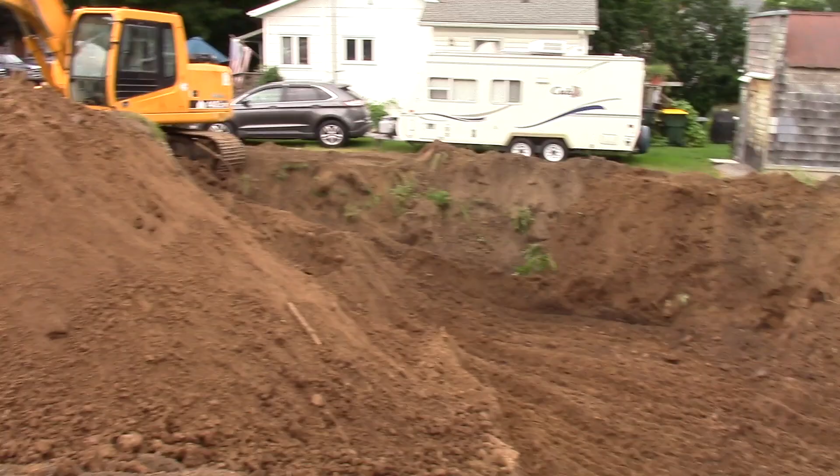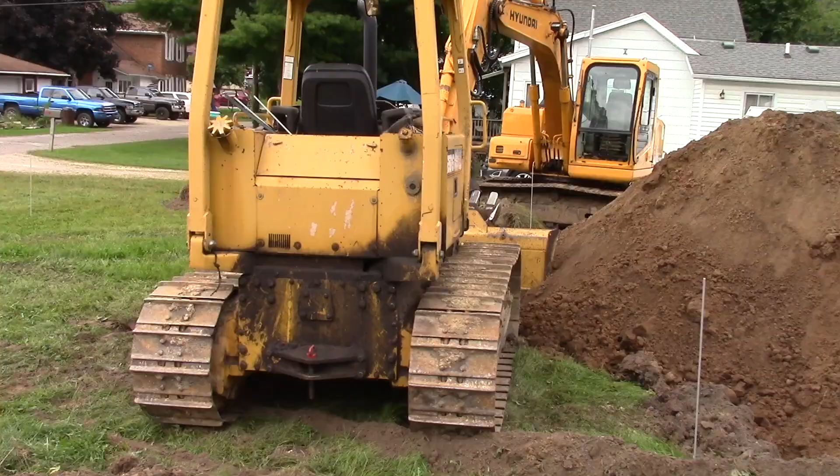Maybe to open things up, we've got a couple folks that want to say some things, and there'll be more introductions coming. Paul Wurtsema is the NHS project manager for what we're doing here today, and he's been working on this for a long time, so we owe a lot to Paul for getting this going and figuring out how we could do it given the economics of today and the circumstances we deal with. Let's give Paul a round of applause. Thanks a lot, Paul.

We'll also hear a little bit from Elijah. He's with Whispering Pines, our contractor that we're really happy to be working with on the project. So with that, I'll have Paul come on up here first. He has a few things he wants to say, and then Elijah, and then I'll have some things to say after that. So, Paul.

Okay, well, thank you all for being here. It's been a long road to get to this stage. Project started yesterday for construction, but a lot of planning went into it.

This has been about a year in the making, conception, putting some information together to get the funding from the state of Wisconsin, which is doing the funding through the Department of Administration. There was an application process, and that took a little bit of doing, making sure we had all of those items in place.

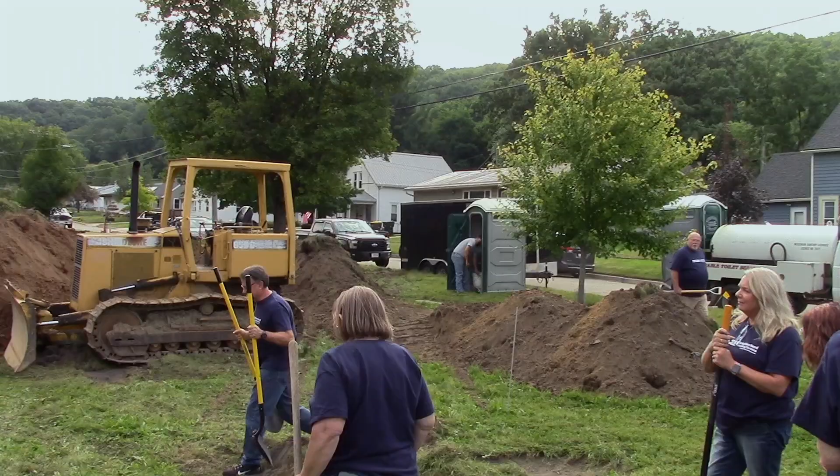I think one thing that's really telling about this crew and this team is when we talk to someone who's done a lot of these, one of our technical assistance advisors said sometimes people buy new shovels and spray paint them gold. When that idea was mentioned to staff, they said, absolutely not, that's not who we are. Let's bring our garden shovels from home. We're going to skip the gold paint. That's not really who we are.

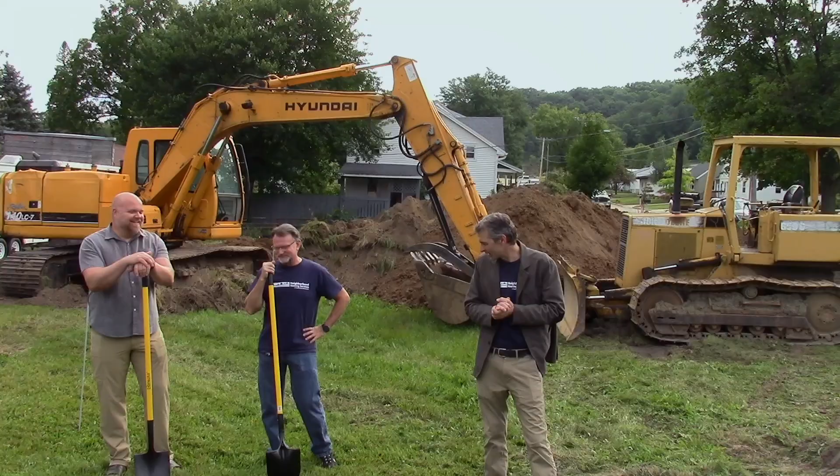So with that, well, there are a couple new ones here. Those haven't been used a whole lot. Yeah, doesn't look like I do much. No, it doesn't matter. So, yeah, come on out here, employees and board members.

A couple more here. We'll do this together. I'll give you my dirty one if you want. We'll try to get the contractor to clean the shovel, probably, but somewhat of a straight line. Oh yeah, thanks for that. It's probably just a general marker, but you never know. Come on over here, Nancy. I think that's what Nate had stuck in when he was here the other day.

Thank you everyone for coming. We'll stick around for a little while. Some of us have work to do, and we'll be getting right back to it.

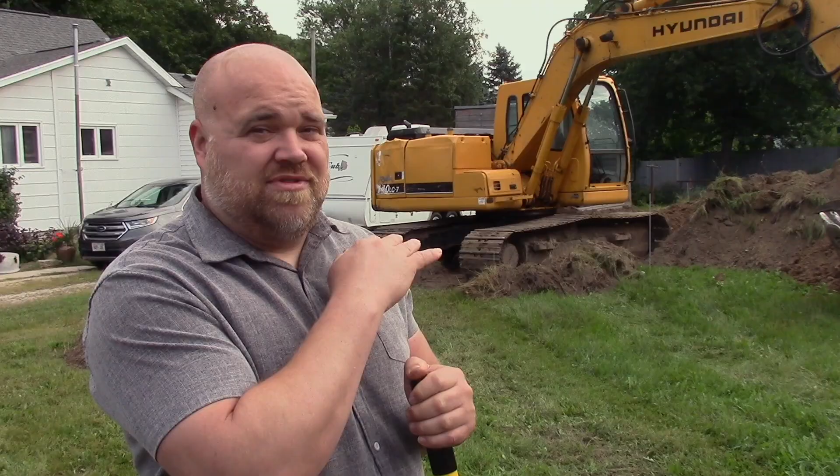From there, we're building an attached garage, and then there'll be a sidewalk poured, a driveway poured, and we'll be tying the two halves together with siding, roofing, trim, etc., and it'll be ready to go. So ideally, I'd estimate 3 months from today it could be ready to be on the market.

The house is going to face south. Technically, what's considered the front of the home faces Larson Street. Some of that had to do with setbacks, being on a corner lot like this. Even though it's more of an alleyway than a road, it is an official road, Larson Street.

The way the home is configured, we just got the state-approved plan which shows where the doors and everything go, so I can't remember exactly where those all face. I haven't studied it yet. But this will technically be the front of the home, with the back facing east, and there will be a door facing Kinder Street, which gives the opportunity for a porch or deck at some point off that front, or off that side, since it's technically the side.

Okay, so there is a floor plan on the brochure here. I'll take a look at that. Whether that's the newest updated one, I'm not 100% positive, but I don't think the floor plan would have changed much. Some of it also is going to be the basement.

So here we have the floor plan. That's correct. So what's Larson is... Larson will be along this side, and this will be Kinder Street here.

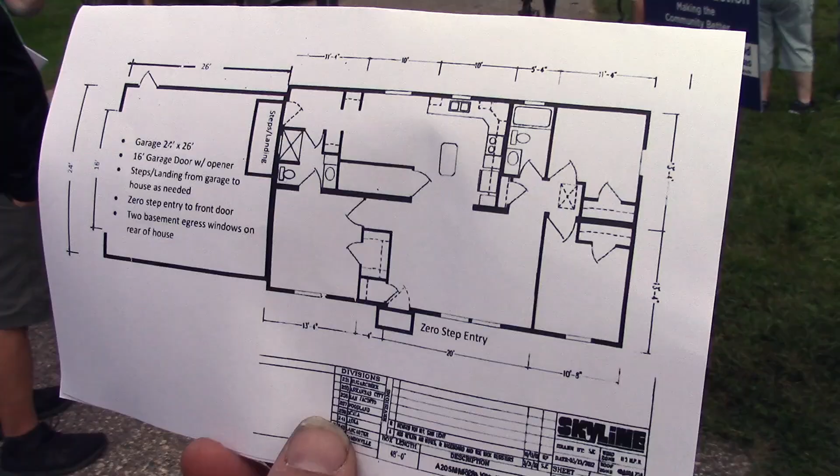And a lot of people who park in their garage go right in — they never use the front door anyway. Yeah, exactly. And the whole point of this, to have zero entry — you'll notice it says zero step entry — is so this will be wheelchair accessible, or if you're a walker or anything else, you don't have to worry about the steps. That's the way to go. It makes everything so much easier.

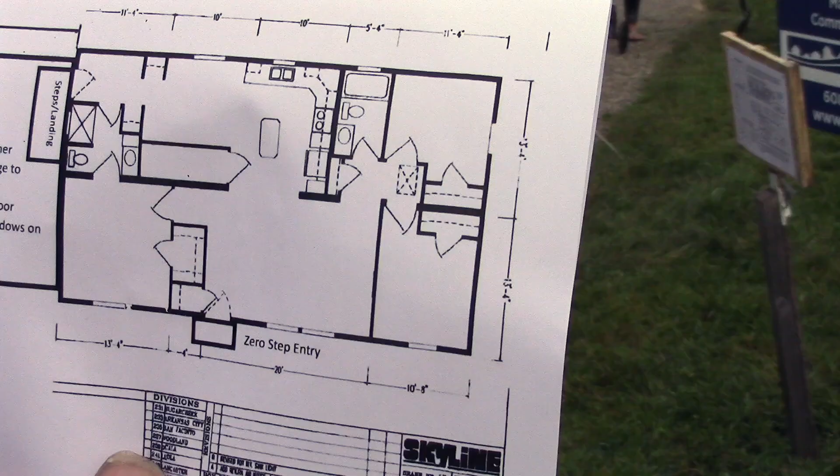And a lot of people have their laundry right on the main floor. It depends on what they're going to do, I suppose.

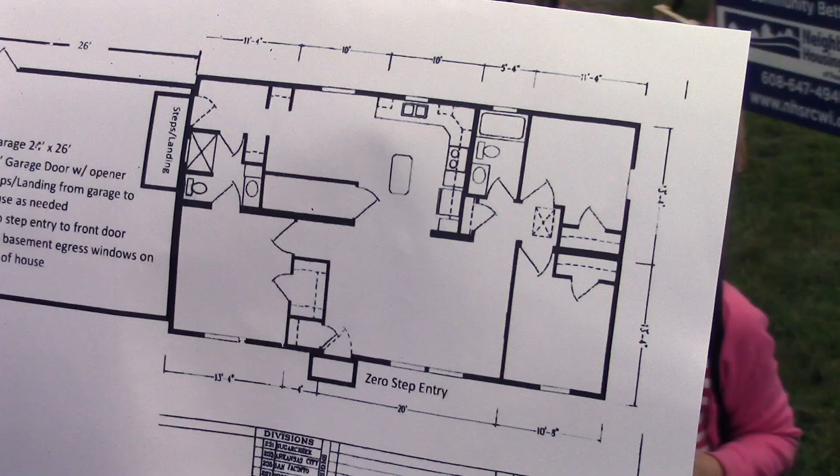Yeah, and like I say, the state-approved plan — Paul, do you know if this is the updated state-approved floor plan, or is this the original that we've been working from? Okay, all right, thank you. Yeah, you bet.